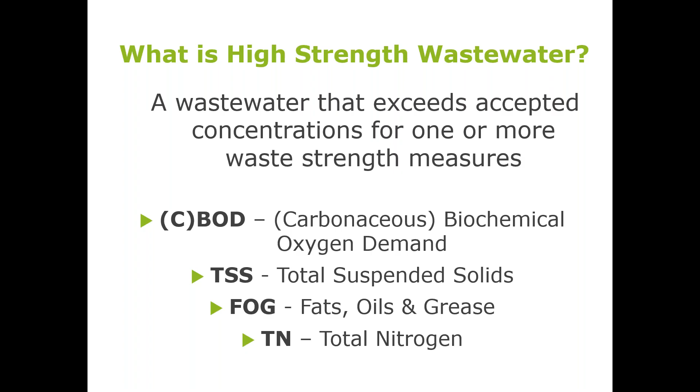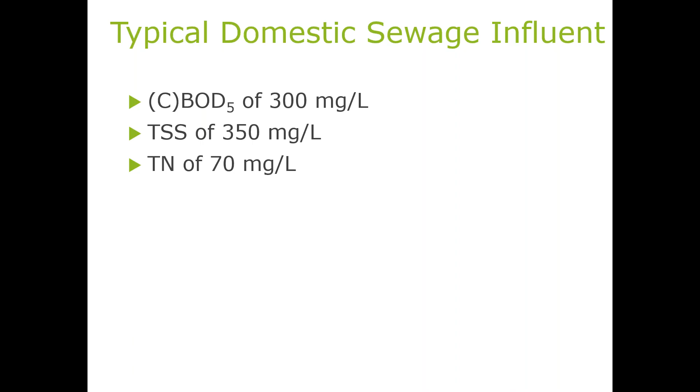Now, it may be in the future that other parameters are added to this list, but let's next state - we're exceeding the accepted concentrations, but I haven't told you what those concentrations are. So let's see what domestic wastewater is thought to contain for these 4 parameters. Influent, what's going into a septic tank, would have a CBOD around 300 milligrams per liter. TSS might be a little bit higher than that, around 350. Total nitrogen, 70 milligrams per liter, but in areas with lots of water-saving fixtures, it might be higher than that.

And FOG, 75 milligrams per liter coming into a tank. Now, this is not in the Arizona code, but don't feel left out—it's not in most on-site wastewater codes. So FOG is definitely something to be on the lookout for.

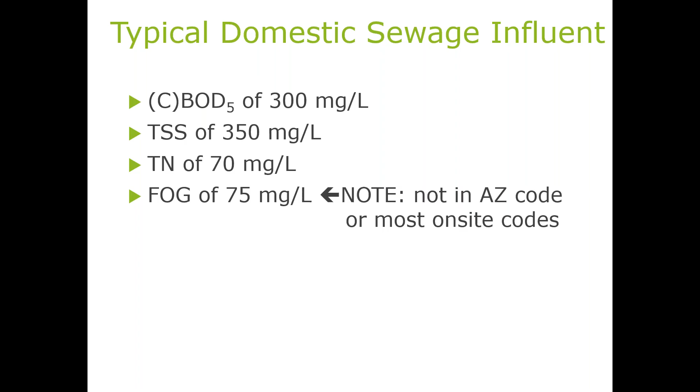Typical domestic sewage will have all 4 parameters close to or below these stated concentrations. But if any one or more parameters are substantially above this concentration, that result by itself classifies the waste as high-strength wastewater. So there are many different kinds of high-strength wastewater, depending upon which parameter is out of domestic wastewater level strength. So here are some examples of high-strength wastewater.

These facilities expect to exceed just one parameter. So a veterinary clinic would have TSS above the 350, and all the other parameters would be below their respective standards, but just that one thing is enough to make a veterinary clinic high-strength waste for TSS.

Interstate highway rest areas will very likely exceed the concentration for total nitrogen due to urine addition as people drive back and forth on the highways.

Food service establishments are sort of the poster child of high-strength wastes, but there are many different types of food service establishments. So, for example, the solution that we might come up with to deal with high-strength waste from a bakery would not be appropriate for a drive-in hamburger and shake place. So there's specifics within high-strength waste for food service establishments. We'll talk about that later in this talk.

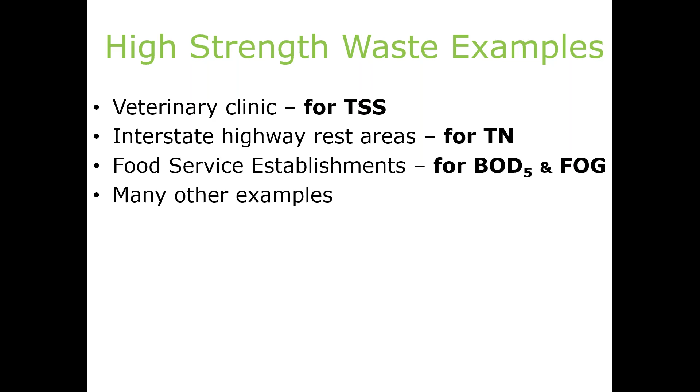Most food service establishments are characterized by having high levels of both biochemical oxygen demand and fats, oils, and grease. Now, this list is by no means complete. There are many other examples than these, and they range from everything from retirement communities to factories. So these are examples of high-strength wastewater.

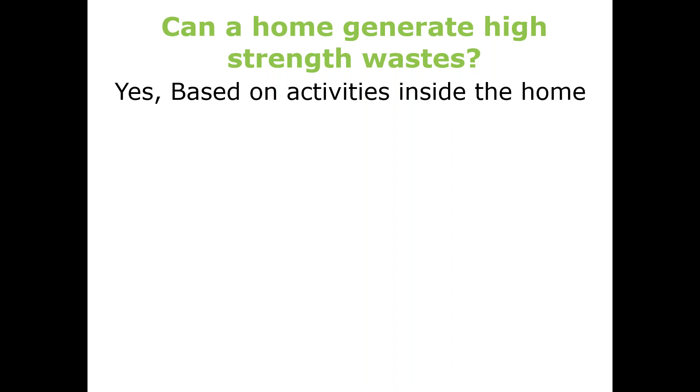A question I get a lot, and might as well answer it now, is can you get high-strength waste from a home? And the answer is yes, you certainly can, based on activities inside the home. It's not typical that home wastewater will be high strength, but through acts of omission and commission, and also just some positive reasons, you can get high strength waste out of a home.

So here's an error of commission. If you're taking in several neighbors' laundry and doing that in your house, you're going to have high strength waste similar to what a laundromat would have. If you're using your kitchen as a catering commissary, that would make that wastewater much like a food service establishment.

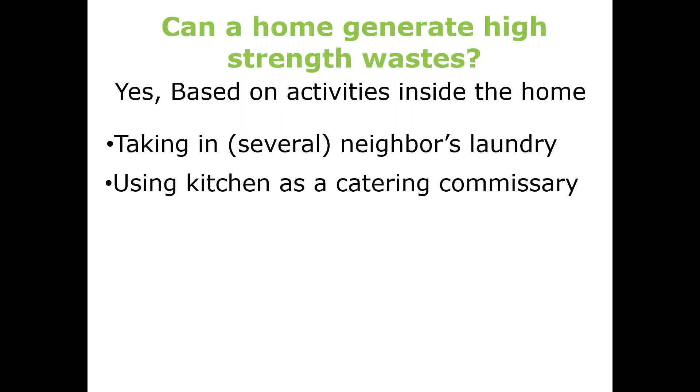If you extensively misuse the garbage disposal, you'll probably have high levels of fats, oils, and grease, possibly BOD as well. And then disposing greasy residues down the sink also would create FOG issues for the home.

And then a positive thing is the best cook in the neighborhood. If Mary is making braciole and I can smell it very easily, when she is, I'm going to return one of the tools I borrow from her husband on a regular basis so that I can at least get a taste of this delicious dish.

Next, we want to explain how the laboratory measures these strength parameters. And I want to demystify these procedures so you'll be able to understand them and not be intimidated by them. I kind of feel like they use very fancy names for things with the idea of like a secret handshake. So I'm going to bust that myth right now.

So first one is biochemical oxygen demand. Biochemical oxygen demand is a measure of oxygen used to break down organic material and other chemicals. The test begins by measuring the dissolved oxygen in a sample. The container is sealed airtight and then placed in an incubator in the dark at 68 degrees Fahrenheit, which is room temperature. No light is allowed in the cabinet during the 5-day incubation period.

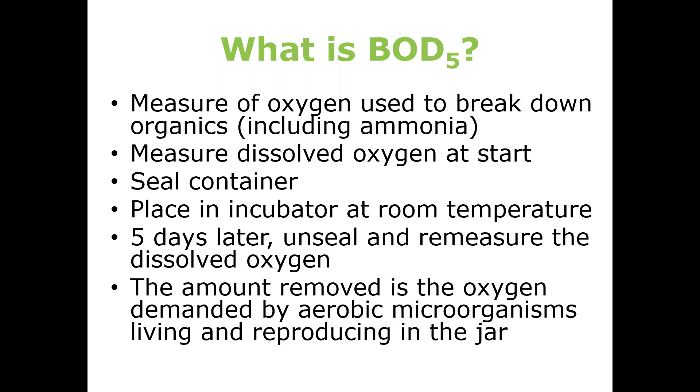To demystify that, think of BOD and CBOD as the tastiness of the sample to aerobic microbes. If the sample is not tasty, one of two things could be happening: it could be a very thin gruel without growth factors in it, or it could have a whole bunch of growth factors but also be toxic. You could feed somebody a salad and steak with hemlock juice in the salad, and they aren't going to finish that meal.

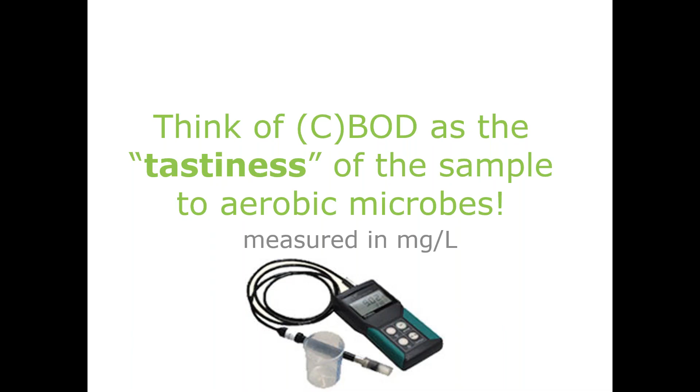Now take a liter of sample water and place it in a funnel above the filter, then turn on the vacuum pump, and it'll quickly pull the water through the filter. Once that has happened, that surface would be peppered with different pieces of small material that help to clog it. We have to take that filter, remove it, dry it bone dry with no moisture whatsoever, and then measure it again. However much that weight has increased, that is TSS.

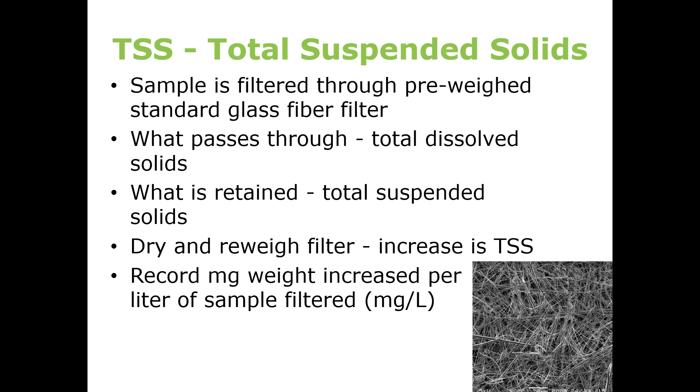So the recorded weight increase per liter of sample - the fully dried filter now weighs 2.63473 grams. So the TSS is 66 milligrams per liter. Think of TSS as the murkiness of the liquid.

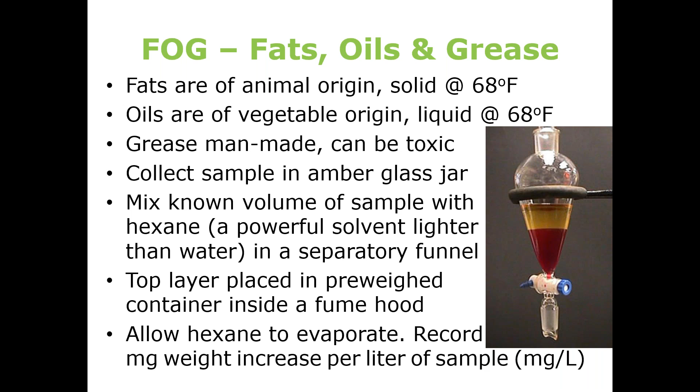Hexane is a material that isn't a supposed or assumed carcinogen - it's a known carcinogen. So the closest I want you to hexane is looking at this picture. But the weight will increase, and what has increased there is the fats, oils, and grease, because that pre-weighed container now weighs a little bit more, and that is the FOG. So FOG is a measure of floatable substances. A properly functioning grease interceptor is important to controlling FOG, and we'll get into this topic in earnest later in the presentation.

The next parameter is nitrogen. Total nitrogen is the sum of total Kjeldahl nitrogen (TKN), plus nitrate (NO3) and nitrite (NO2). Nitrogen is a remarkable element - it binds with other nitrogen atoms to form N2 gas, diatomic nitrogen gas, and there are literally billions of tons of this nearly inert gas in our atmosphere today. It makes up 78% of the air that we breathe. Other forms of nitrogen, however, are explosive. For example, there's something called TNT, which stands for trinitrotoluene, and if you knock into it, you could make it explode.

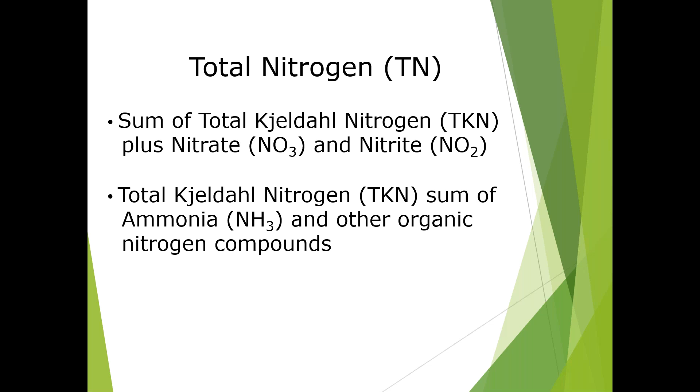Yes, microbes consume carbon. They're called heterotrophs, and they consume some of the oxygen in a sample during a BOD test. But they're not alone. A second, very different group of microbes called nitrifiers also exert a separate NBOD, or nitrogenous biochemical oxygen demand, on the sample. Nitrifying bacteria include species from the following genera: Nitrosomonas, Nitrobacter, Nitrospira, and others.

These bacteria are all what are called chemoautotrophic. That's a pretty fancy name, isn't it? Well, chemo means chemical, auto means self, and troph translates to feeding. So a chemoautotroph uses chemicals to feed itself.

Another example of an autotroph is a green plant. A green plant is a photoautotroph. It uses light to feed itself through photosynthesis. Contrary to the theme song in The Big Bang Theory, an autotroph will never drool.

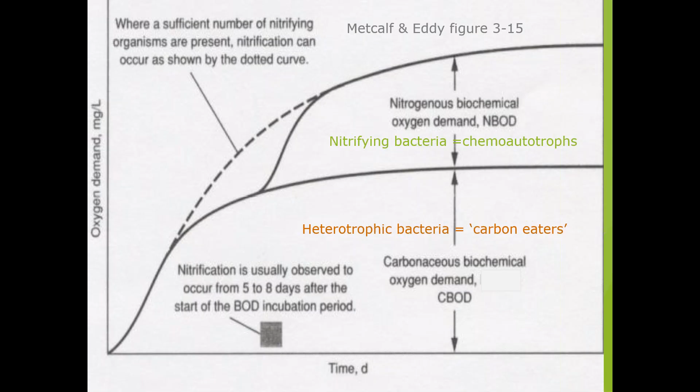Nitrosomonas does not care for direct sunlight and does not need the presence of carbon, because where carbon is found, heterotrophs are going to be really abundant. It's going to have a hard time finding its way.

So both of these bacteria genera have an arsenal of organelles to help them alter the chemicals they take in and absorb as much of the energy from that conversion as they can. They shut down when the water temperature gets below 50 degrees Fahrenheit or 10 degrees Celsius, or the alkalinity gets low, and they are destroyed by solvents such as acetone. In a word, these guys are finicky.

So step one of nitrification is a bacterially mediated process. The first step is the slower of the two, and therefore it's called rate limiting. Basically, if Nitrosomonas isn't playing on the playground, nobody else is going to get to play. So Nitrosomonas takes in the ammonium, converts it to nitrite, and gains some energy from that. Then once it's converted to nitrite, Nitrobacter and Nitrospira can take that and gain energy from that reaction, leaving nitrate, NO3, as the ending chemical.

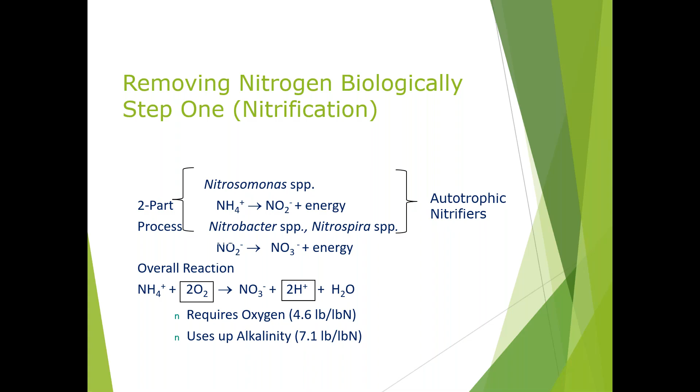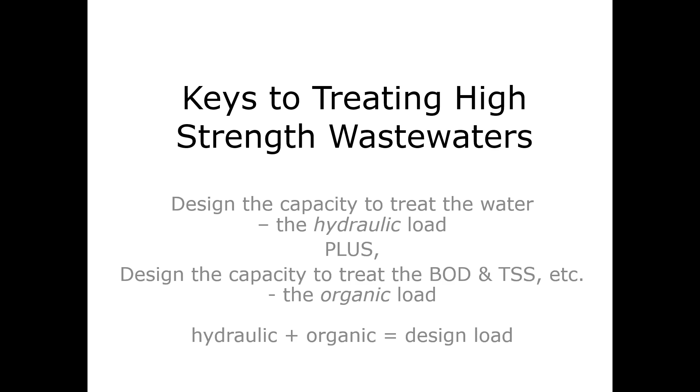So the keys to treating high strength wastewaters, well, there's two of them. We need to design high strength wastewater treatment systems based on both the hydraulic load, how much water is there, and the organic load. So the design load is the sum of the hydraulic and the organic materials. Now, you're pretty used to using the first half. We need to add the second part. It's going to take some math that you may not be used to doing, but I'm sure you can do it. So let's get into determining these organic loads.

So the organic load is found in pounds or kilograms, but they're determined mathematically using some pretty interesting mathematics. Let's see if you can follow what I'm trying to say here.

I have a problem for you, and you may have seen this problem before. We have a sewage flow of 450 gallons per day for a facility, and the soil in the area has an absorption rate of 0.4 gallons per square foot per day.

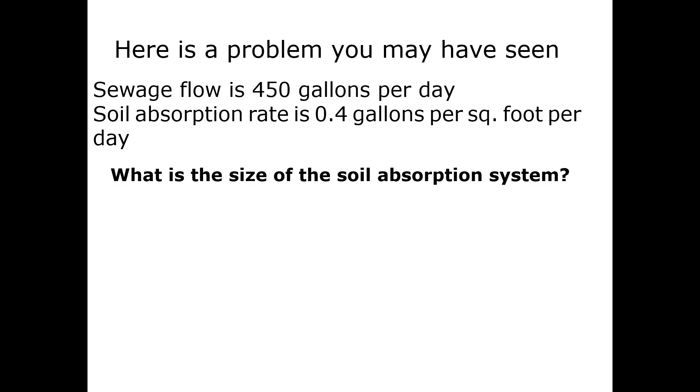What I'd like you to do is tell me what the size is of that soil absorption system. I think you're going to see that what most of you would do is take 450 gallons per day and divide it by 0.4 gallons per day per square foot. And you'd come up with an answer of 1,125 square foot.

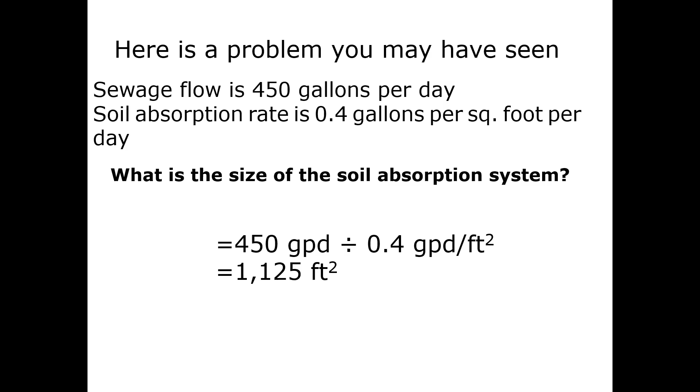Well, that's the correct answer, but I've got one last question for you. When did you get so good at algebra? Because that's what you use to get that answer.

Here we have GPD above and below a divider, and it cancels each other, and it's now no longer in the equation. And also we had a number 0.4 gallons per day per square foot, so square foot was below, and now when we divided that, it comes up to the top. Both of those things are algebra, and we're going to use it even more as we go further in this topic.

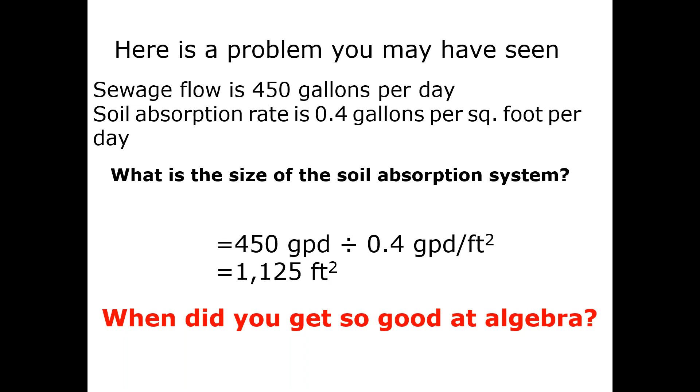So I have a confession to make. As I went through college, I realized I no longer had to memorize equations or formulas. Just stopped doing it. Instead, I followed the units to get the answer that was being asked for.

To do that for you here today, I first need to develop a conversion factor. That conversion factor involves more precise numbers, less rounding than we're used to seeing, but everyone focuses on the numbers. I'm going to ask you to focus on the units because they are really the most important thing.

So most of us say it's 454 grams in a pound, but actually it's more precisely 453.6, 1,000 milligrams in a gram, and 3.785 liters in a gallon. We're going to take all three of those and come up with a conversion factor.

And that conversion factor is a really small number. It's 0 followed by a decimal point and then 5 additional zeros, 834. But the units are liter pounds divided by gallons milligram. And you'll find that that is sort of the key. We also call that 8.34 times 10 to the minus 6, which tells you to move the decimal point 6 spaces to get the original number.

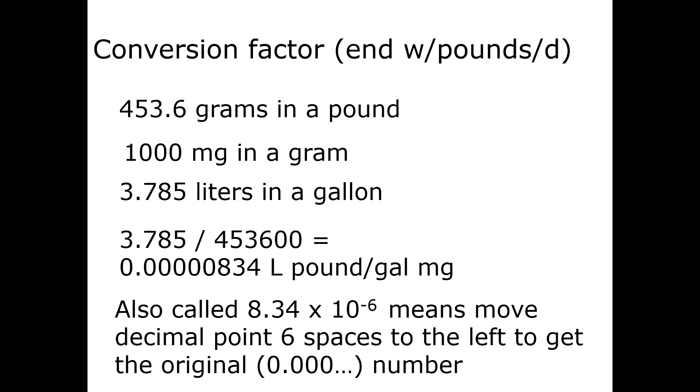So we want to calculate pounds per day of CBOD. And we can do that using this equation: the flow, which is gallons per day, times the CBOD concentration in milligrams per liter — totally different measuring units, but they are going to be canceled out eventually anyway. And then we have our conversion factor.

So if we have a restaurant with 500 gallons per day and the CBOD is 800 milligrams per liter, which is not an outrageously high number — you can get much higher than that in numerous high strength waste applications — when we have our conversion factor, what we're going to find is that first of all, there's gallons above and below a divider line. So poof, don't worry about them, they're gone. It's gone to 1.

The milligrams above and below, they're gone too. And now liter, it's the opposite. You know, the first one, it's below the divider, but in the conversion factor, it is above. And so we wind up with all of that, multiplying these things, the units that we're going to wind up with is pound per day.

So we'll use that for an example restaurant. Say it's a 500 gallon per day restaurant, pretty small, but let's just do that. 800 milligrams CBOD, and our conversion factor, and that particular facility is going to generate 3.32 pounds per day of CBOD.

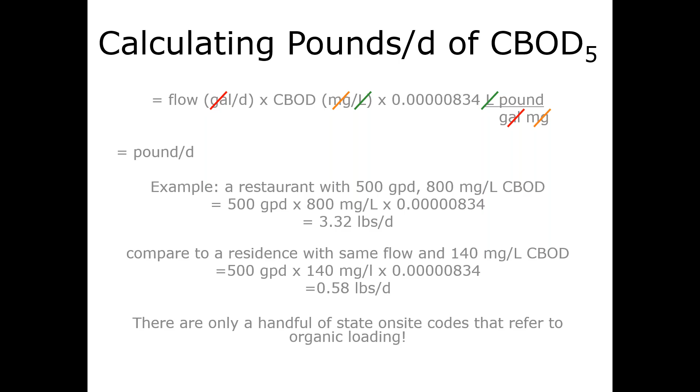Some research that was done in the state of Florida while I was the contract manager for the University of Florida. We started a multi-year research project on food service establishments. And we basically had 15 different food service establishments, all within the Gainesville, Florida area. That's where the University of Florida is located. And the university basically did this work, and I'm just reporting on it to you.

Full service restaurants, self-service restaurants — both of those are many hours a day, basically breakfast, lunch, and dinner. But there are self-service restaurants that take less hours than that, might just do breakfast and lunch or lunch and dinner. A drive-in, bar, cocktail lounge, 2 grocery stores, and 3 convenience stores were all studied in depth during this project.

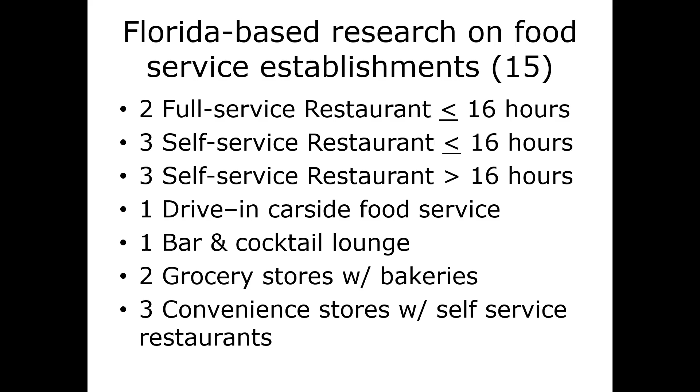Samples were collected quite a number of years ago, from 1997 to 1999. They were able to look at all 15 of these food service establishments and get multiple samples from them. We wound up having to take composite samples because grab samples were as variable as you're going to see in this data—the grab samples were just unmanageable.

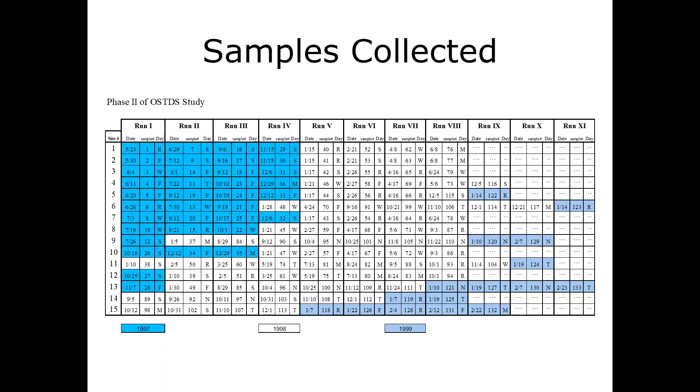So the data from that, we had 109 data points of CBOD, and the mean was 374 milligrams per liter, but it ranged all the way from 53, a low, all the way up to over 1,000.

We also recognized that there were different groupings within each of these different parameters—low strength waste, medium strength waste, and high strength waste. These were valuable to get from sampling actual facilities so that we could build some additional efforts into determining the long-term acceptance rate, and we'll get into that in just a little bit.

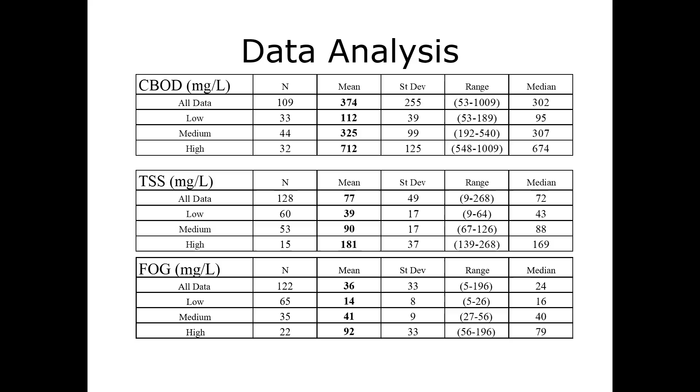With FOG, there were 122 samples, TSS 128, and they all had different means, standard deviations, ranges, etc. But a lot of data was collected and was used to categorize all 3 parameters in terms of their particular strengths.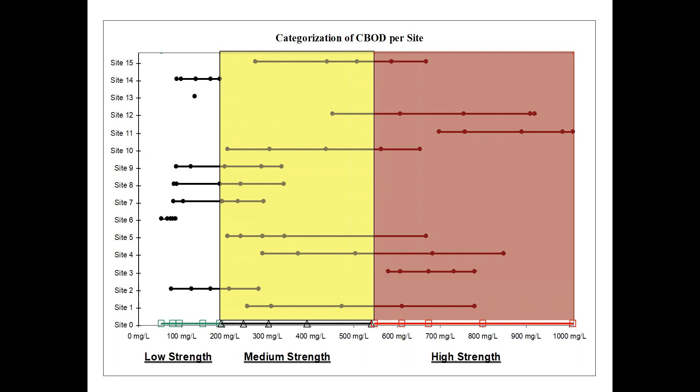When it came to TSS, there was even more variability. In some cases, the site had TSS that fell in all 3 categories, depending on when it was sampled. And there are a lot of TSS—the systems using chlorine addition, that really didn't affect TSS. That was as variable as the other ones.

And then FOG just goes really all over the place, and it gets quite strong in certain types of establishments. So we have these 3 categories, and we can basically create a synthetic wastewater and try to reach these targets. They never really could get to the target—they were always a little bit underneath it.

Because as you're mixing the witch's brew together, the mixer itself would become coated with sticky components and wouldn't get into the sample—it was basically collected by the stirrers, etc. No wastewater was included in these synthetic wastewaters; they were pathogen free. They used spam, dextrose, which is a type of sugar, vegetable oil, and dog food in various recipes to make each type.

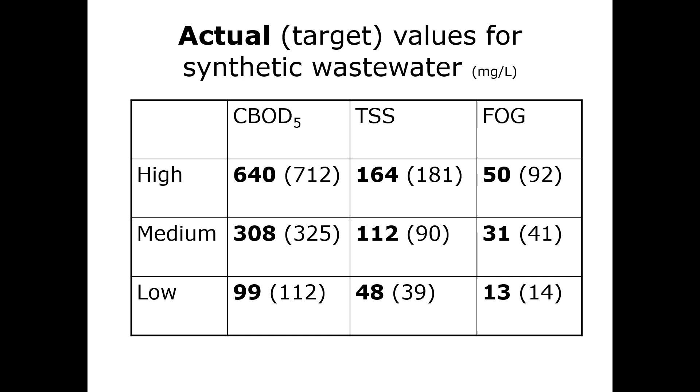Consistently under target because of the problems with the mixing.

Native Alaskans have 17 different words to describe snow and ice because they see it all the time. Well, Floridians have multiple words to describe sand because we see it all the time—so we have sand, fine sand, loamy sand. We also have levels of saturation. We certainly don't have the kind of depths to water table that you have there in Arizona. So we have a 2-foot, that would be standard, and 1-foot would be for repair.

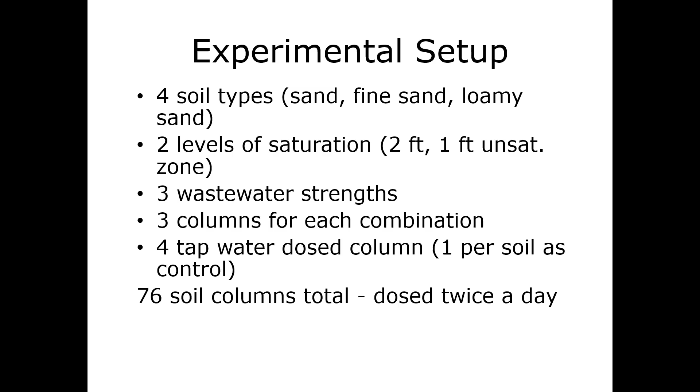3 wastewater strengths—low, medium, and high—each done in triplicate, so there are 3 columns for each of these combinations. There were a total of 76 columns put together, including 4 tap water dose columns to act as a control. These were dosed twice a day over time to develop a response to the wastewater being put on top of the surface.

So we had a 6-inch limestone aggregate, and then soil—all soil profiles were 42 inches, whatever the particular soil was, very common in the Gainesville area. The air ports allowed oxygen to get into the soil, and also the water table was set where it needed to be in each of these—so you have a 2-foot unsaturated zone and a 1-foot unsaturated zone.

They were then run for multiple days, and the effluent was collected in the container at the end of the day and discarded, leaving the cup open for whatever happens the next day.

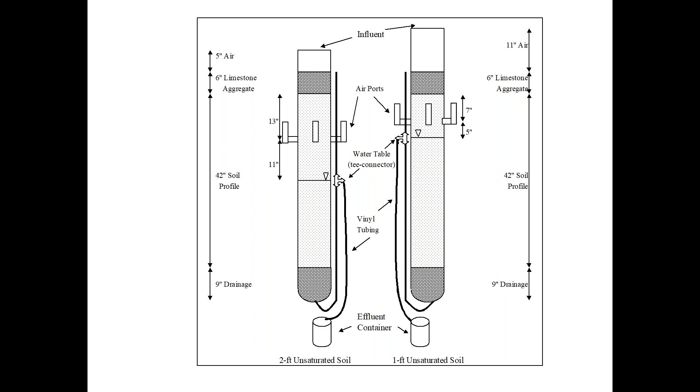So soils have names. In our case, the most popular soils were the Candler series and the Millhopper series, and each of them has a different color and texture of soil with depth. So the Candler series, all 42 inches, were yellow medium sand. Millhopper had a different color, etc.

And these were put in a 12-inch pipe, many feet long, and basically filled by hand.

We also have a lot of places in Florida that don't have suitable soils, and so what they do is basically take off the O horizon and add fill to those. They could use either Astatula or Candler as fill in places that have unsuitable soils.

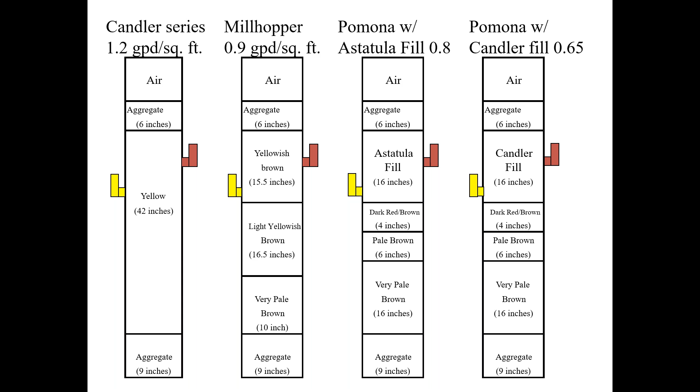So this is one rack of lysimeters that were set up to determine the long-term acceptance rates, and these are all getting low strength wastewater. These numbers of columns going from 1 to 24, there's a control, but there's also a low strength wastewater that's put in at the ones closest to you, which have 2-foot unsaturated zones. The ones on the other side have only a foot of unsaturated zone. And so these were dosed repeatedly over time.

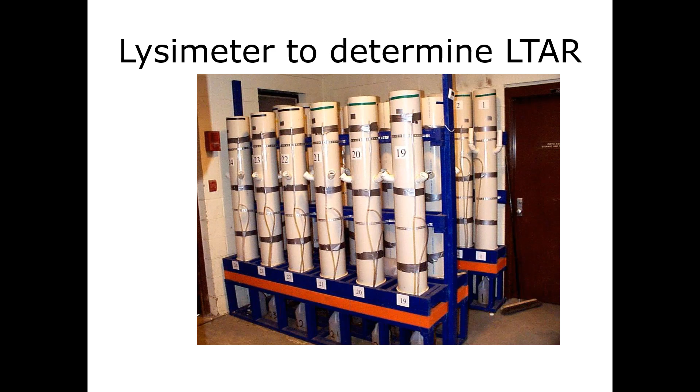During this study, 3 graduate students got their MS engineering degrees doing this project. Brian Matachek is in the left-hand photograph, and he was one of the main people who got really excited about this and did an excellent job.

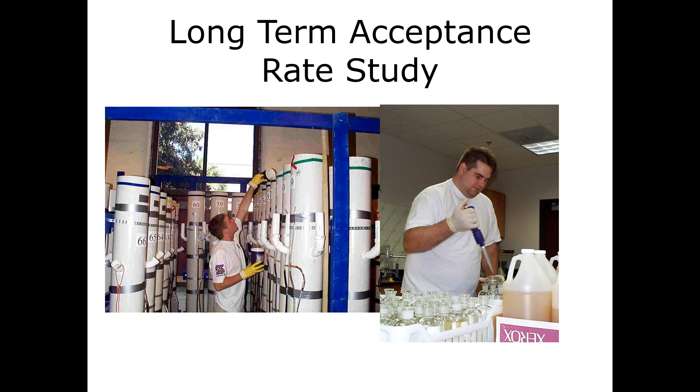Now, a column failed when the last dose was visible above the aggregate just prior to the next time a dose was coming in. So you knew the column was about to fail, and you were given early warning when you looked at the drain that night before and there was no water in there. It didn't fully drain out of the column, meaning it's backing up and it's going to fail very quickly.

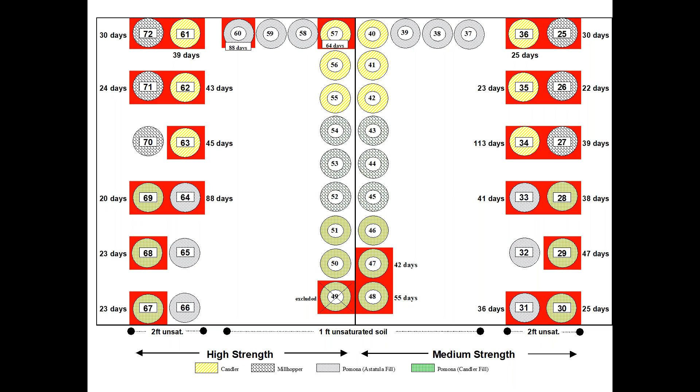And so you see failures occurring, some very quickly, like within 20 days, so less than 3 weeks, and systems fail, but some took quite a few days, up to 113 days, of the addition of this high strength or medium strength waste on a recurring basis. And so we had failures, we wanted failures, so that was a good thing. But when it happened and how it happened was sort of the key to understanding what was going on.

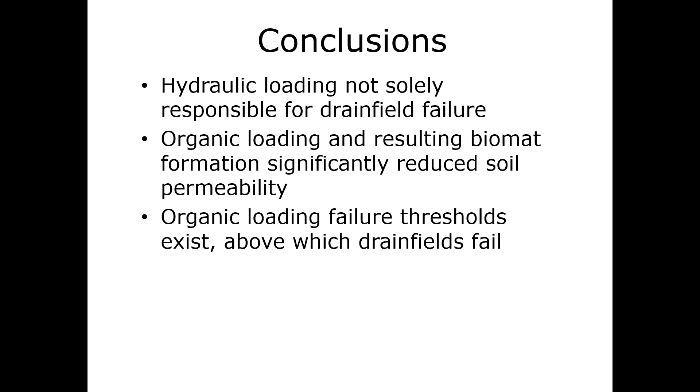So the hydraulic loading was not solely responsible for the drain field failure. The organic loading and the biomat formation was what really made it happen. Reduced soil permeability just basically didn't let it get through, and the organic loading failure threshold exists. And if you wind up organically loading above that threshold, that's when that drain field is very likely to fail.

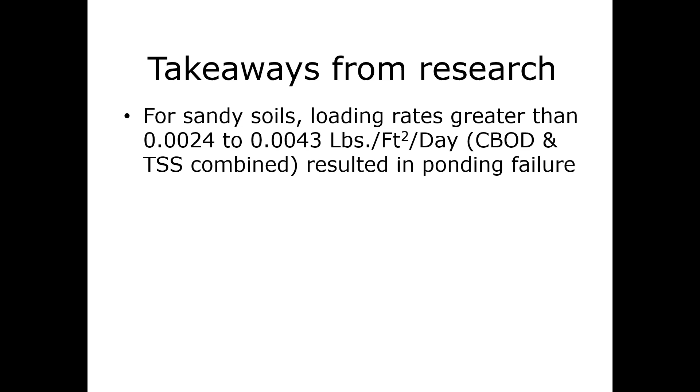And so what this research taught us was a couple of things. For sandy soils, which is most of what Florida is, loading rates greater than 0.0024 to 0.0043 pounds per square foot per day, using what I taught you earlier about how to measure the organic loading, we took the CBOD and TSS values combined. Those were the ones that resulted in ponding failure. So this is basically the threshold you want to stay under.

Below a critical loading level of 0.0014, the soil columns did not pond. And over time, you can get more CBOD and TSS transferred across the soil surface if you keep below that threshold in terms of mass loading of your BOD and TSS.

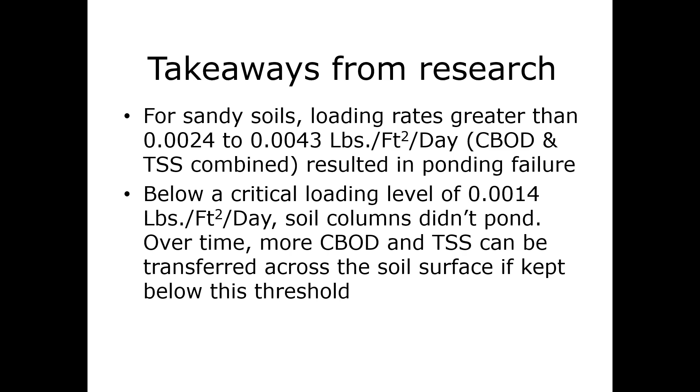So I didn't mention fog because fog is the kryptonite when it comes to getting failures. So it's very important that when you're dealing with food service establishments, that you design and maintain gravity grease interceptors to protect that drain field.

So the design concept, what it is we're trying to achieve: we want to take wastewater with a high level of fog and food solids and effectively retain as much of those solids and fog as we possibly can. We want to release a treatable wastewater into the next downstream component of the system.

And also, I very cautiously talked about the next downstream component, because what I'm talking about, grease interceptors, is equally valid whether we're talking about a restaurant row in a large city or a single restaurant on an on-site system. They both need to have functioning grease interceptors to protect what comes after the restaurant discharges.

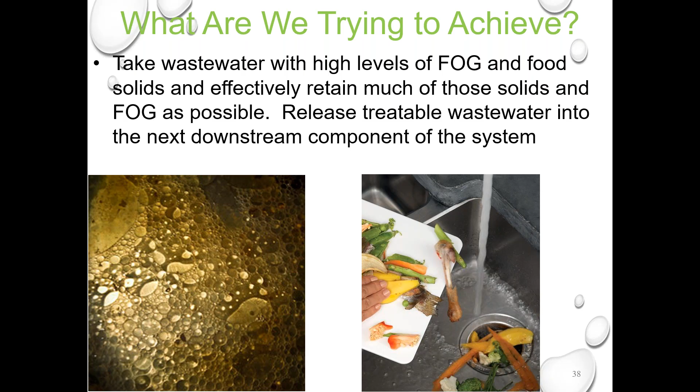So the design concept for a grease interceptor: it has to accept the grease-laden liquid from a food service establishment, hold on to it, and let that contained liquid cool. The lighter-than-water fraction of that wastewater will rise to form an upper layer, and that upper layer can be very, very thick in a grease interceptor.

The solids, though, settle on the bottom in a sludge layer, maybe 6 inches thick. So flotation and solid settling must occur under calm conditions. The technical term would be laminar flow, and not a lot of turbulence.

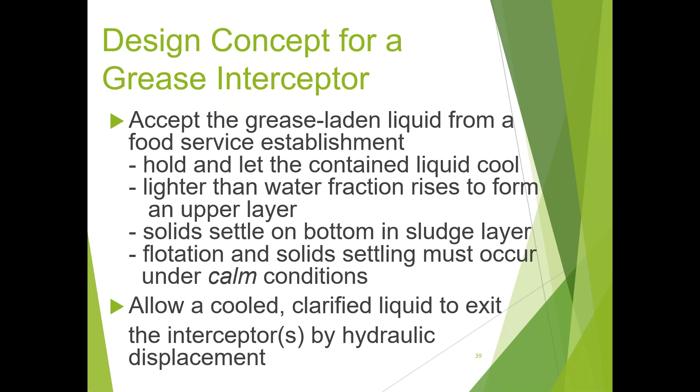And what we want to do is allow a cooled, clarified liquid to exit the interceptor by hydraulic displacement. So hydraulic displacement, simply: if 1 gallon comes in, 1 gallon goes out. Now, if 10 gallons go in one 15-second period, it's not going to escape in 15 seconds. It's going to take a lot longer to get out than it got in because of friction and gravity and all those things that are going to get us all eventually.

So we have 3 different types of grease interceptor, and depending upon what the code requires, you may only have to do one or others, but I really like to use all 3. Hydromechanicals are basically used inside the food service establishment itself and can collect wastewater and get it solidified prior to going outdoors to the next tank.

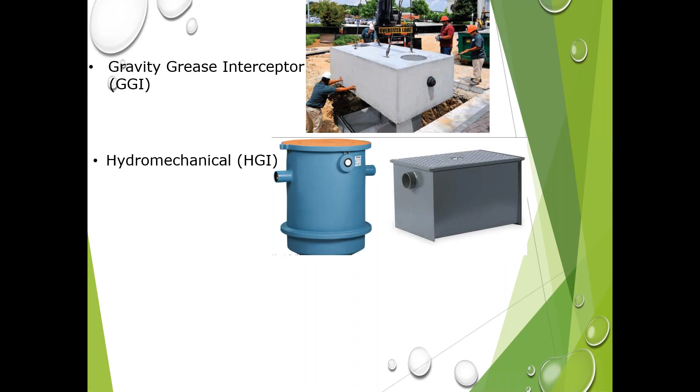And what that'll do is it'll get the grease while it's still yellow grease, which gets a much better price for recycling compared to brown grease, which you might get from a gravity grease interceptor. There was a time not too long ago where people were just trying to get rid of this stuff anywhere they could, and now they basically have this under lock and key because it is valuable.

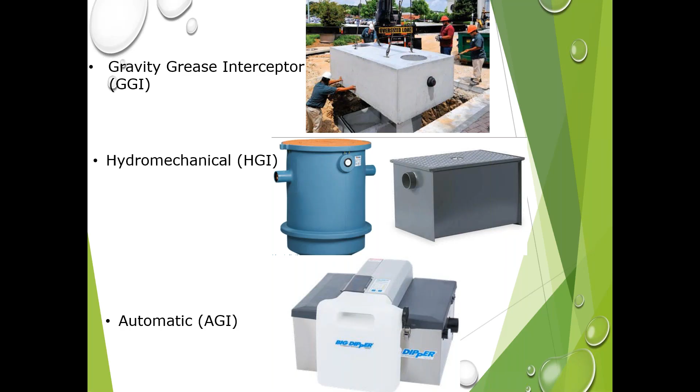Even the brown grease can be used for making biodiesel. And the yellow grease, ladies, hold your hands over your ears, that's used in cosmetics - lipstick, foundation, all that stuff. So these 3 things are all options, but I'm going to focus on the gravity grease interceptor because that's the most common one.

And there are 3 ways to get good performance out of a gravity grease interceptor. I call them the 3 T's because each one of these begins with the letter T. So the first T is time, because we have to cool this.

We have to get it to a point where fats begin to congeal and come out of liquid form, and that's a function of the total capacity and the flow path that goes through these grease interceptors. So we use baffles and compartments to prevent short circuiting. We also use commercial grade filtration to make sure that the solids will start to congeal, and if that happens, then the liquid oils will begin to accumulate on there as well because they have a lot in common.

Temperature is a function of what you start out with, the hot water setting, detention time, and surface area, because we need to cool these things quite considerably to start to get the fats, oils, and grease to come out of suspension. This T should have a circle and a cross through it, because we don't want any turbulence. We want material to settle based on its specific gravity.

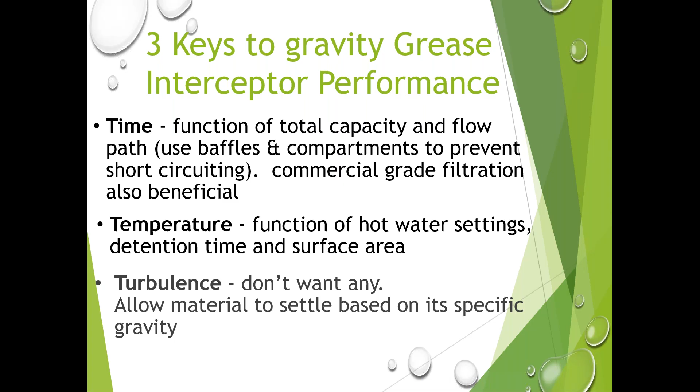Anything with specific gravity less than 1 is going to float, and that's most of the fog. Any solid material, like from that person trying to get bones through the garbage disposal, is going to be in the sludge. So temperature, the second T.

A commercial dishwasher will discharge 170 degree Fahrenheit water. If they switch to a chemical sanitizer, it allows them to lower the water temperature to about 130 degrees Fahrenheit. Big deal, right? Actually, it really is, because animal fats will start to come out of suspension right around 100 degrees Fahrenheit. So you're getting much closer to that value by using a chemical sanitizer. It's very significant.

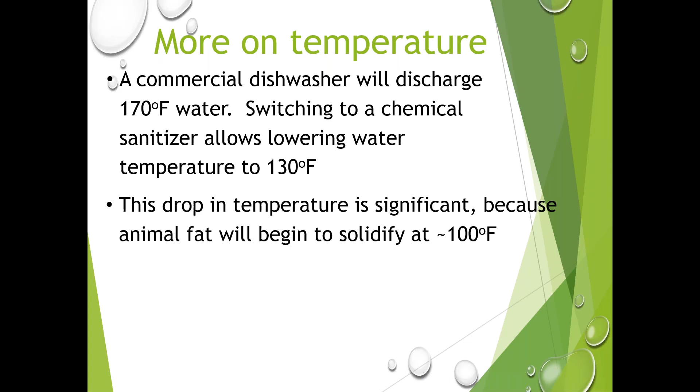Some have used air lines to strip out the temperature, but when they do that, they make a turbulent mess of things, and I don't recommend doing that.

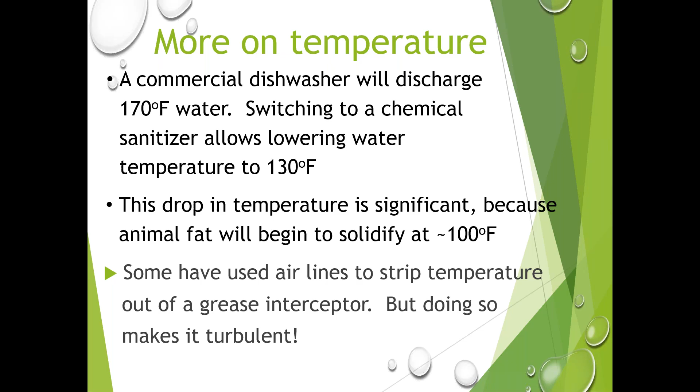Melting points of various lipids are shown on this slide, and I'm reminded of the old statement by Mark Twain that said, all generalizations are false, including this one. So I'm telling you these are the melting points, but it doesn't happen exactly at 84 degrees for pig fat. It occurs over like a 5 degree period, and it just gets more and more solid as you get cooler and cooler.

Olive oil won't come out of suspension until it's 43 degrees, so unless you're living in Alaska, you're not going to get olive oil to come out.

It also depends upon the species of animal, and it depends upon where in the body those fats are taken from. So with sheep, it's 104 degrees for belly fat, but there's a different melting point for what they call leaf lard, which is around the kidney area.

And for cattle, it's 90 degrees with corn fed, but it's a lower number with grass fed. That's why grass-fed beef is so popular - it melts in your mouth, and that's why.

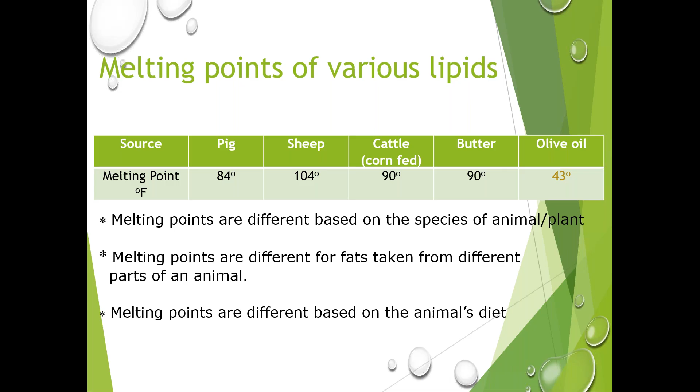Turbulence, fog, floats, suspended solids sink - and the way you can instantly tell if the tank you're looking at is a grease interceptor or a septic tank is to look at the outlet and inlet pipes. They're going to be much deeper, close to the bottom of the tank, than they would be in a standard septic tank. So here's an example of a concrete baffled tank, with inlet, outlet, and then the sample pit.

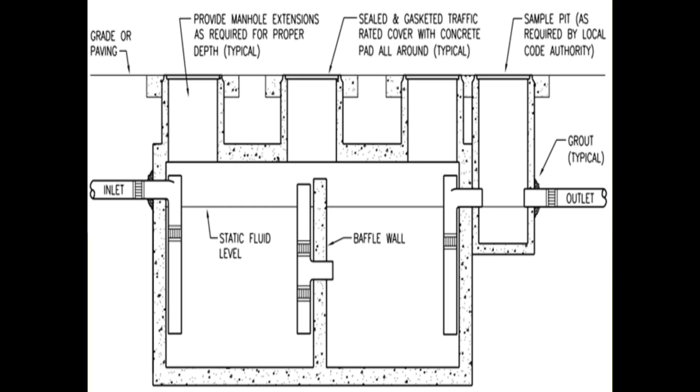That's basically used in cities where they take a sample from every restaurant on Restaurant Row, and then when the lift station needs to be replaced, they come around and take a mandatory collection from each of the restaurants, and they'll all be saying, 'Oh, it's the Mexican place. No, it's the Chinese place. It's this, it's that.' They all pay for their errors of omission and commission, and they wind up having to replace that at hundreds of thousands of dollars, with everybody putting in their fair share.

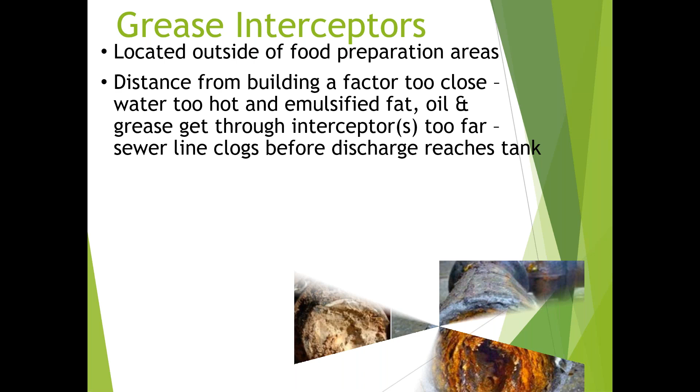So grease interceptors for septic systems are located outside of the food preparation area, and the distance from the building is a factor. If it's too close, the water will remain hot and emulsified fat, oil, and grease will get through the interceptor. If it's too far away, the sewer line clogs before the discharge reaches the tank, and you get these lovely types of photographs.

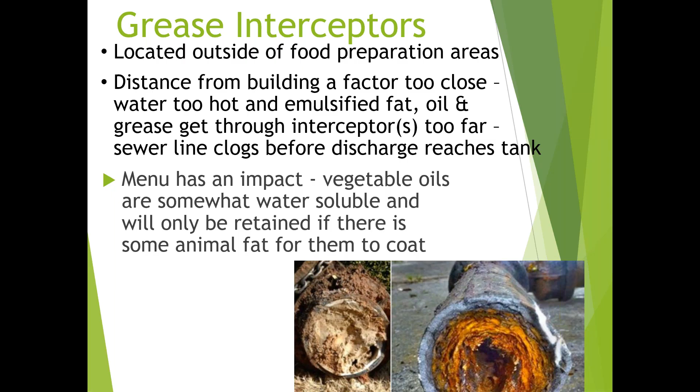So where we put this grease interceptor - a parking lot's a good choice, a loading dock, under decks if they have hinged access. A 30 to 60 day service frequency is what I recommend. If you have to go out every week to service a grease interceptor, it's way too small.

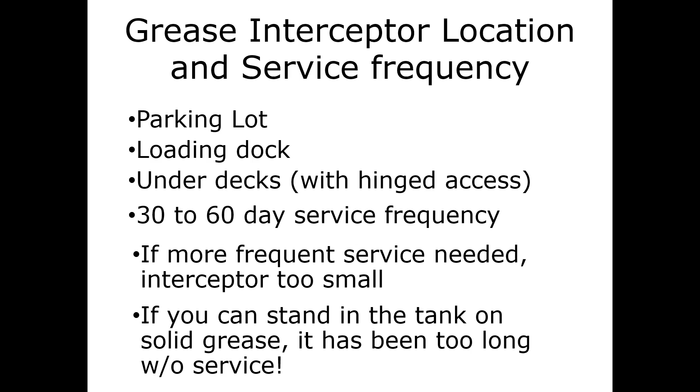If more frequent service is needed, it's too small. And if you can stand in the tank on solid grease, it's been too long without service—and I have done that. So clearly, some people are not really fixated on how long it's been since their grease trap has been pumped, and as long as they can avoid getting yelled at, they will stop trying to do it.

But all of these ways that are used to heat something up can, in reverse, be how something gets cooled.

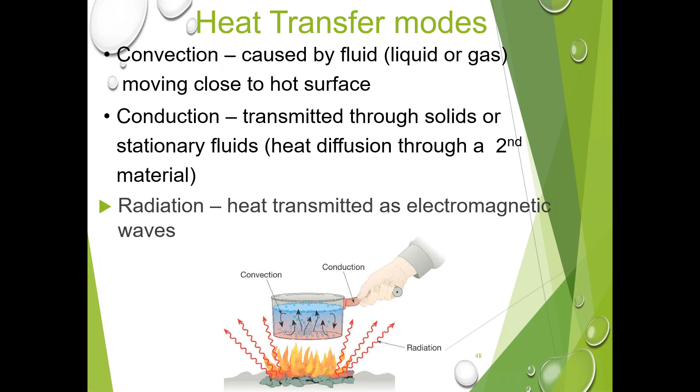What I recommend doing is putting an air vent—a low vent—on the outlet side of the last grease interceptor in the series, letting air move across the surface of that tank and go out through the roof vent. As that happens, it's going to take the heat with it, and it's going to be a lot more effective for your performance of how that grease interceptor functions.

And the density of air is in our favor here: the hotter the air gets, the less dense it gets. So hot air rises, cold air sinks, and you're able to get air preferentially out of the grease interceptors and up the pipe to the roof very nicely with this situation.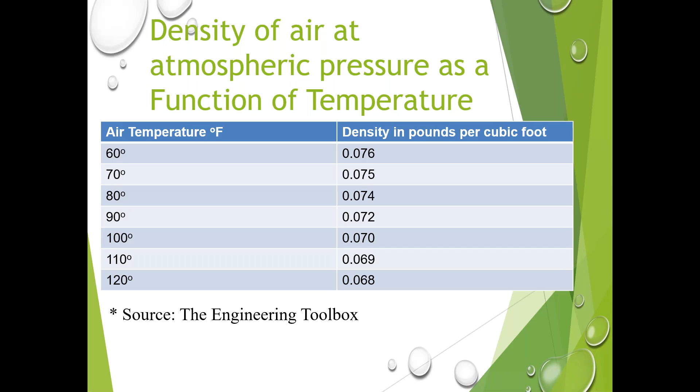Another thing to think about is preventing short circuiting, an idea that comes from Leon Holt, retired from Cary, North Carolina—he calls it a double-barreled grease interceptor. Basically, in a one-pipe type system, you're hoping that as water moves from inlet to outlet, it takes the whole center of the tank with it. That's not going to happen—it's going to be something a little bit wider than 8 to 12 inches that moves through there.

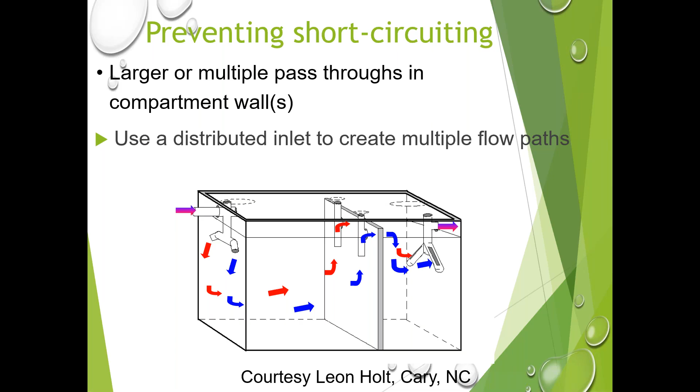So I would like to put in multiple effluent filters on the outlets of these tanks. What they do is train the restaurant owners to get service before they have a major problem. These are two in series.

Beneath them there are pipes down to the floor of the tank, because these would get incredibly heavy over time. You couldn't just cantilever them out into the liquid and hope they would stay there. They would crack open that pipe and everything would be on the floor. So you put a toilet flange on the bottom, then a length of pipe up to the base of these, and let it fill up over time so you can change them out on a nice regular basis.

So what happens if you leave it alone is you get an emergency call from the restaurant saying, hey, we need our grease interceptors pumped. And yes, you certainly do, but it didn't get so bad. It kind of trains them not to put this off, not to wait until the last minute to get something done.

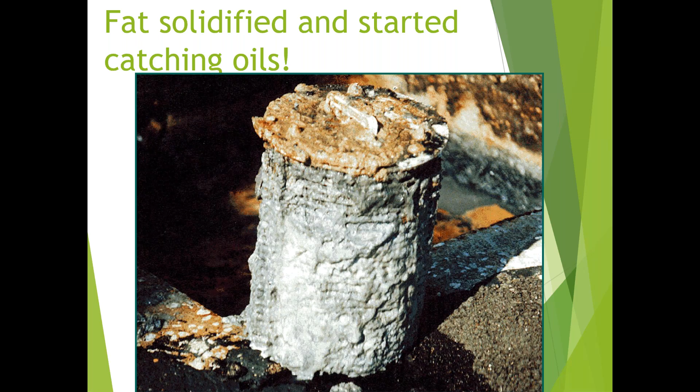So, for a facility, how do you figure out what's necessary for them? Typical operating hours are going to be the places where you have peak flow. What is the 4 square foot of that restaurant that the owner knows the most about? It's basically the 4 square foot around the cash register. They keep an eagle eye on that. So they should be able to tell you how many meals they served today, how many yesterday, etc., and you can check your sizing using that information.

The menu itself doesn't really impact grease interceptor sizing. I think it's a red herring to start worrying about stuff like that. It's just... now there is something though.

Self-service salad bars create a FOG nightmare, and I'm as guilty of this as anybody. If I'm served a salad at my seat and they bring me a little cup of dressing, I happily put that on my salad, spread it all over, eat it - it's delicious, I love it. But if I'm at a self-serve salad bar, I'll take a scoop and put it on my salad, then think, well, I could use another scoop. You wind up with a lot of FOG in the wastewater because you're overusing that dressing.

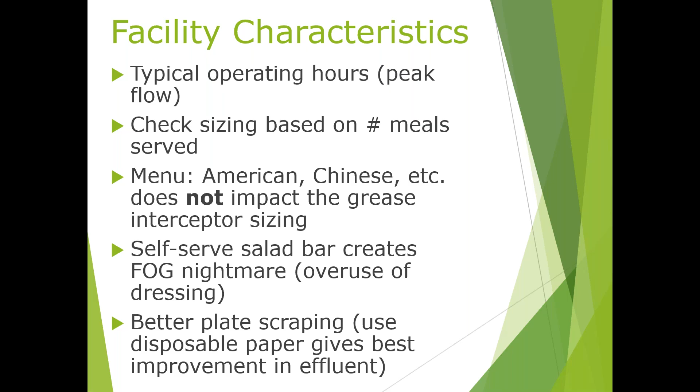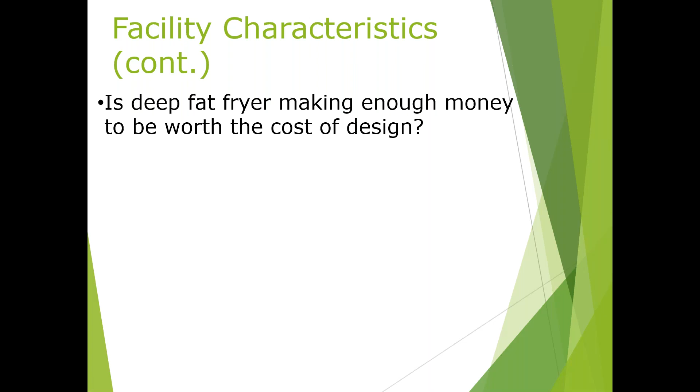We are famous in this arena for telling people, well, congratulations, here's your septic tank, and here's what you can't do now. I really don't want to take that negative tack with people. What I'd much rather do is ask them, okay, what's your plan for a deep fat fryer, and how much money you're going to make, because it's going to cost a lot more to design it and require more frequent maintenance - is this something that works for you? Rather than just saying you can't do it because you were silly enough to use an on-site system.

Now, self-service soft drink and ice cream drippings are very high in BOD. They should be eliminated as much as possible. Ice machine drippings and cold water thaw send many gallons of water to the system unnecessarily, so try to stop that from happening.

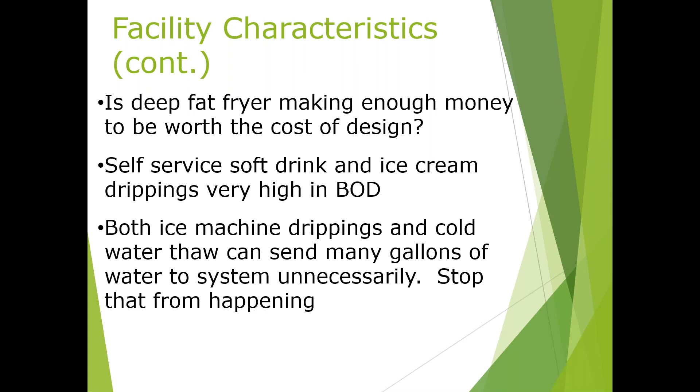When you're in the field, you may be able to troubleshoot effluent characteristics pretty easily. If you put your gauntleted hand in the grease interceptor at the outlet and you can't hold it there, right there it's telling you that it's too small. It's short circuiting - there's some kind of problem with this grease interceptor.

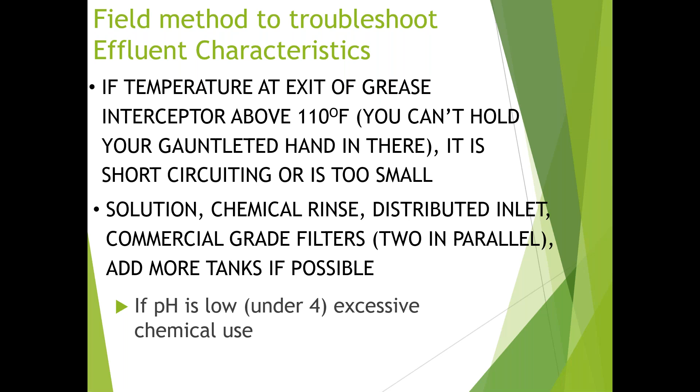A solution might be using a chemical rinse, a distributed inlet, commercial grade filtration, or more tanks if you possibly can. If the pH is low, that means there's excessive chemical use in the facility, and basically the person selling them chemicals is overloading them because he wants to take a trip to Hawaii - he wants you to pay for it.

Final tips and tricks.

If there's excessive fog, even at 100 degrees Fahrenheit, you can change the menu from vegetable oil to vegetable shortening. Now, vegetable shortening includes lard, which is an animal fat, so it's not something a vegetarian or vegan would be willing to make that kind of change. But depending on the facility, they may say they'd be more than happy to go to vegetable shortening, and that would mean you'd get solids out of solution at a much better temperature. Once you begin to solidify at higher temperatures, it allows the vegetable oils to coat that fat material. And my last tip is make sure you service all your tanks just before Mother's Day.

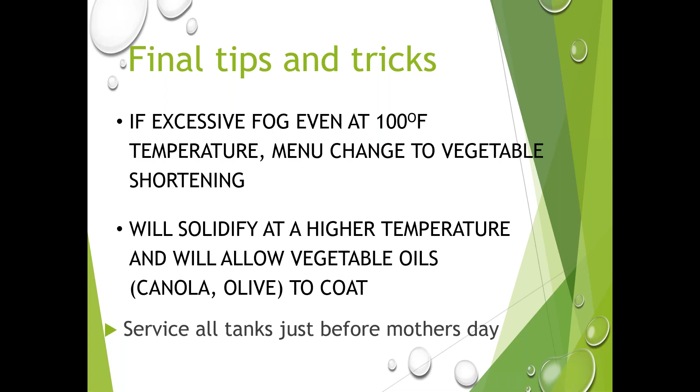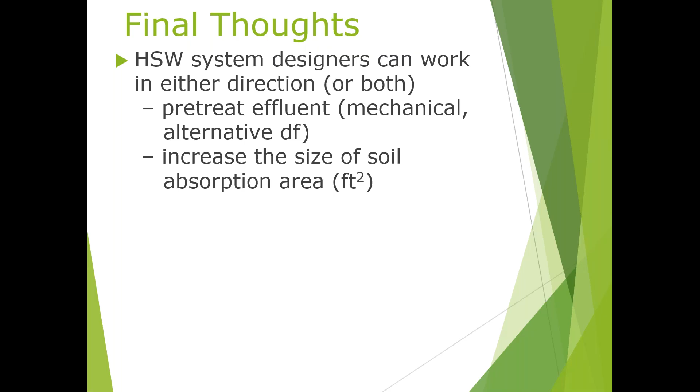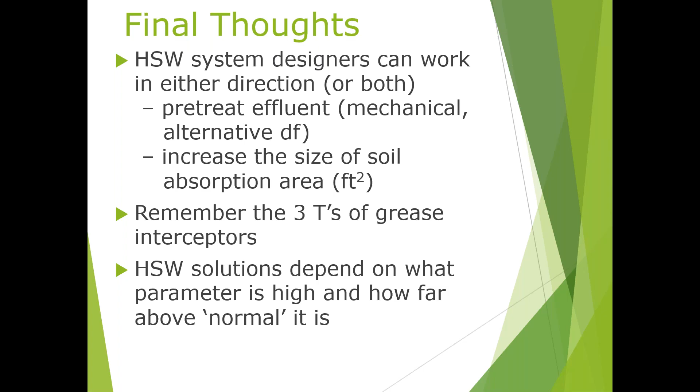Okay, final thoughts. High strength waste system designers can work in either direction or both. They can pre-treat the effluent using mechanical means or an alternative drain field product, or they can increase the size of the soil absorption system, working on the square footage of the equation, or they could do both. If successful, they will have long-lasting high-strength waste systems. Remember the three T's of grease interceptors: time, temperature, and no turbulence. The high-strength waste solution depends on what parameter is high and how far above normal it is. Final warning: none of this makes sense if there are toxins mixed into these wastes. Toxins trump strength.

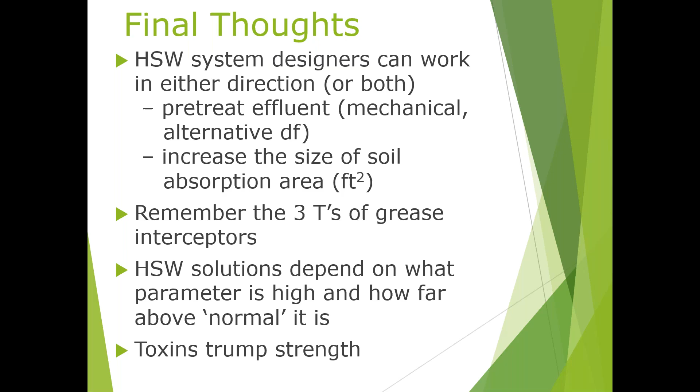And that's it. I can take any questions that you want to send my way.